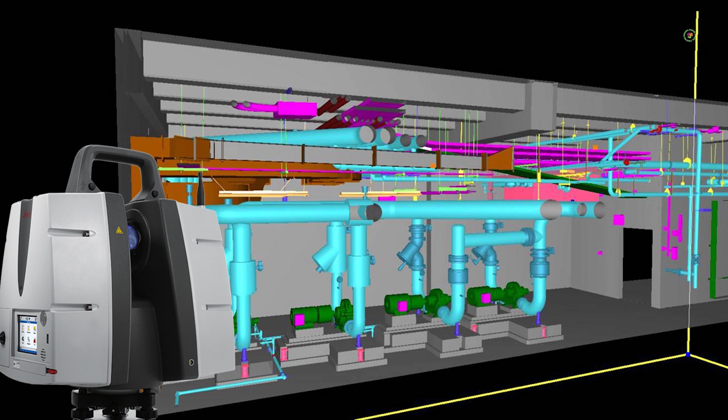There will be a main pipeline, distribution pipelines, sub pipelines, finally going into the house. Each pipe diameter is different. The mainline pipe bringing water to the overhead tank may be 1 meter or 50 centimeter diameter, but the main pipeline taking water to the entire village may be 30 centimeters. From there, the pipeline going to sub pipelines may be 15 centimeters.

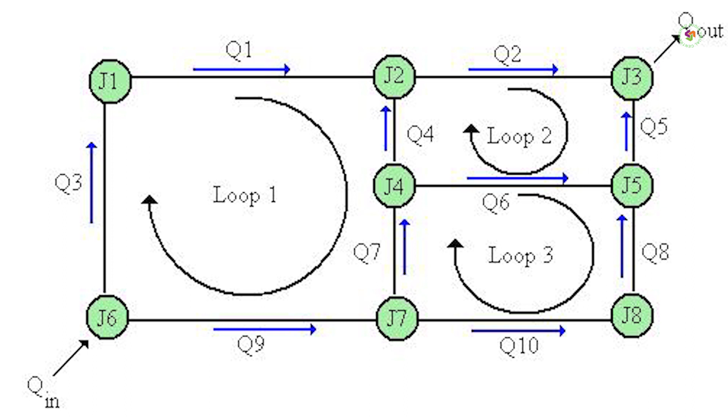From there, the pipeline going street-wise may be 10 centimeters, and from there to your house it may be, for example, 2.5 centimeters. So there are different pipeline systems.

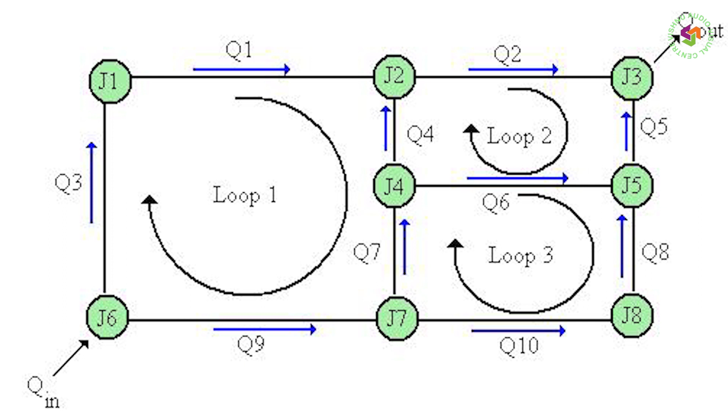My sincere request to you: please visit a pipe shop and inquire about the various sizes of pipes available. You cannot have your own custom size of pipe. For problem-solving or theory learning, we can write any diameter - 9 centimeters, 5 centimeters, 4 centimeters, 3 centimeters, 2 centimeters. But are they really available in the market?

The market availability will be different. There may be, for example, 2.5 centimeters, 1.25 centimeters, 5 centimeters, 7.5 centimeters, 10 centimeters, 15 centimeters. So what are the standard sizes of pipes?

You can check YouTube for standard pipe sizes used in water distribution systems, which gives you an idea about what is happening actually. So in that context, how this pipeline network works - a little introduction only we are giving at this level, real analysis I'm not touching here, that's beyond your level.

You should understand there is a system of network analysis when planning water distribution to a village, area, municipality, or town - whatever it is, there is a system. I want to introduce this so that once you enter the field and start doing it, you understand how to go about it. With this introduction, I will share the whiteboard and let us discuss in detail.

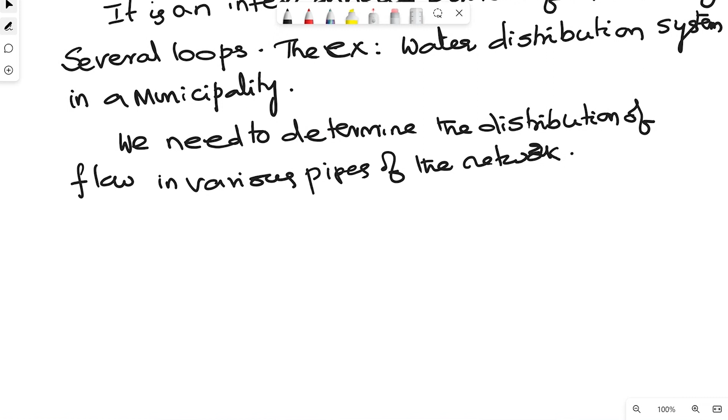In order to really do it, there are certain necessary conditions to be satisfied. What are they?

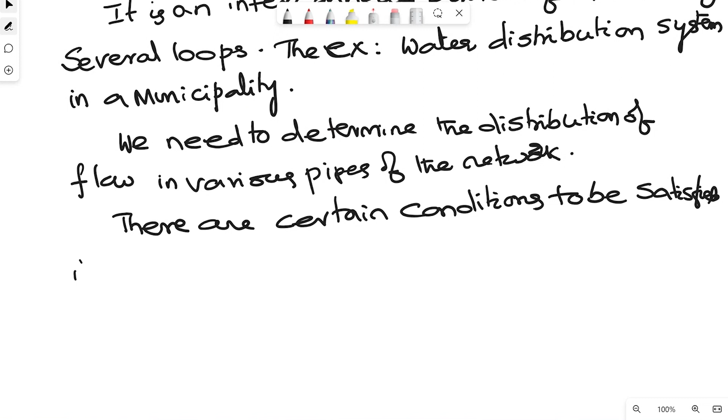Number one, the flow into each junction is equal to the flow out of each junction. That's nothing but satisfying the continuity equation, that's all.

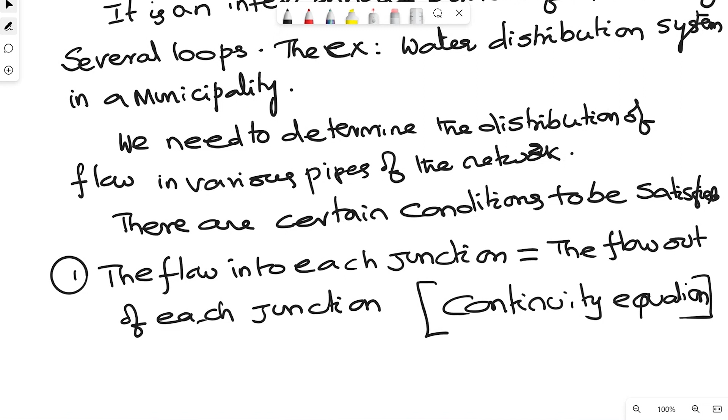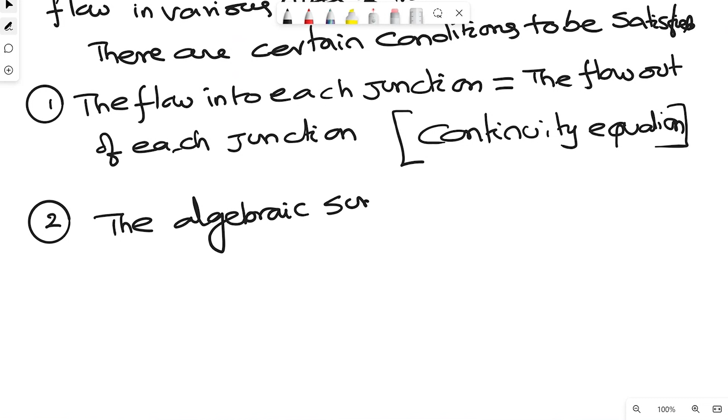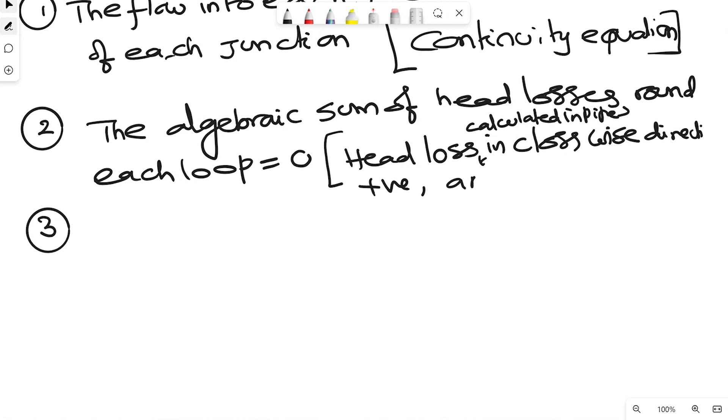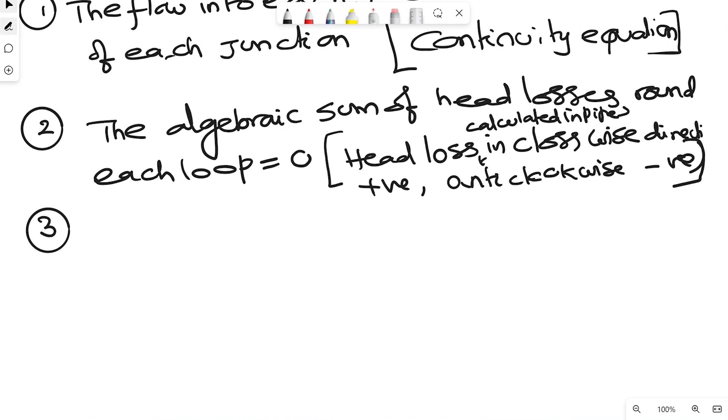Then number two, the algebraic sum of the head losses around each loop is equal to zero. I will explain by drawing a loop also. We take head loss calculated in pipes in the clockwise direction as positive, and anti-clockwise as negative to calculate with.

Then next, head loss in each pipe is given by HF equals R into Q square. What is this R?

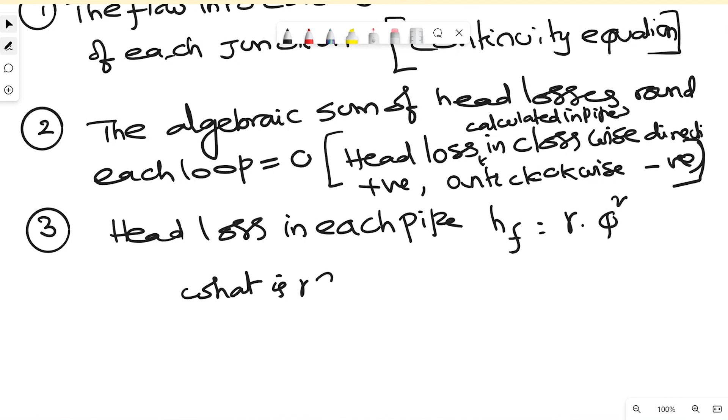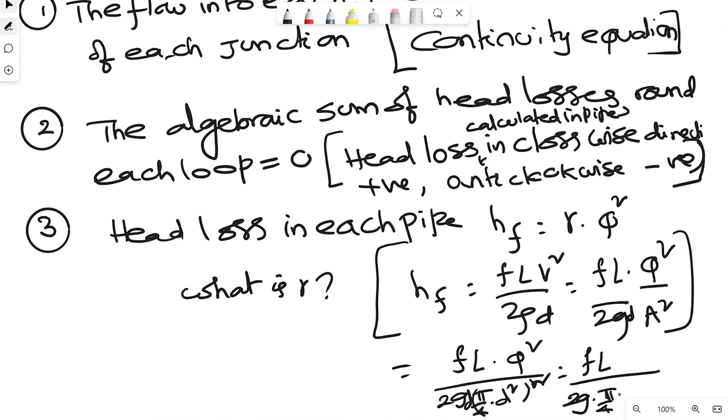Suppose, for example, you take it. You know HF is equal to FLV squared by 2GD. So what I can write, FL into Q square by A square into 2G. So that is equal to FL into Q square by 2G into pi by 4, basically 2GD into pi by 4 D square whole square. So it is FL by 2G pi by 4 whole square into D to the power of 5 into Q square.

This is called as R. It is equal to RQ square. So kindly note that. Then fourth point, as it is difficult to solve the pipe network problems

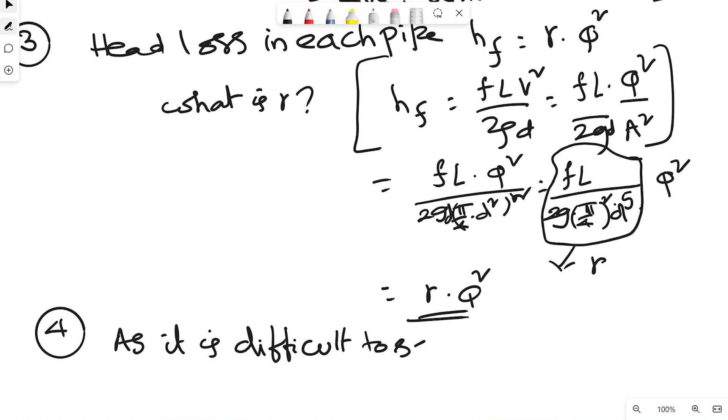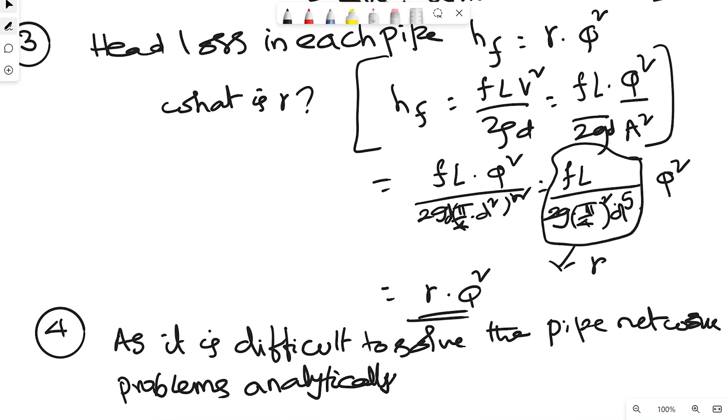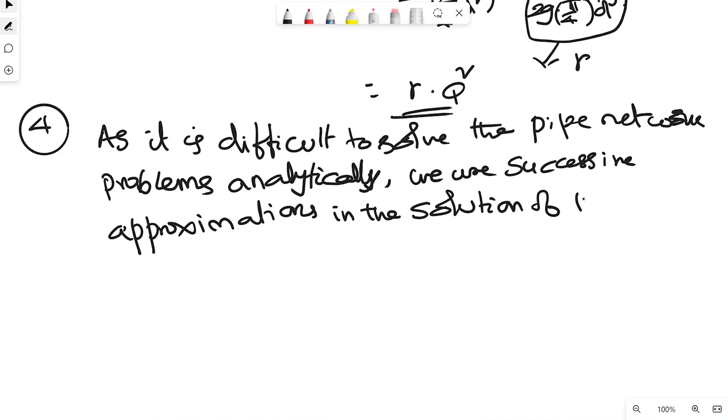analytically, right? We use successive approximations in the solution of the problems. That is next.

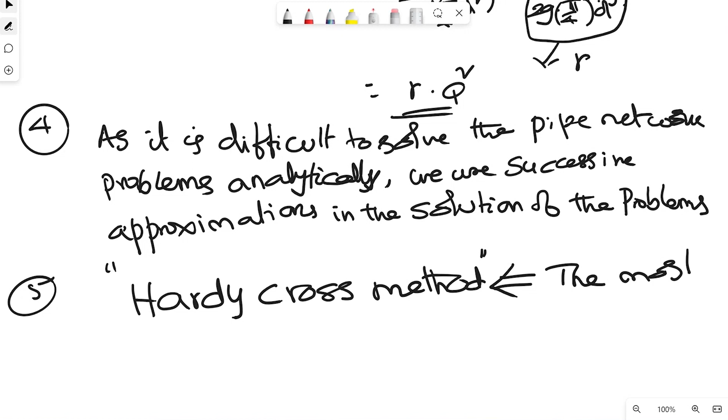The last one is the most popular method to solve the pipe network problems is Hardy cross method. This is the most popular method to solve pipe networks.

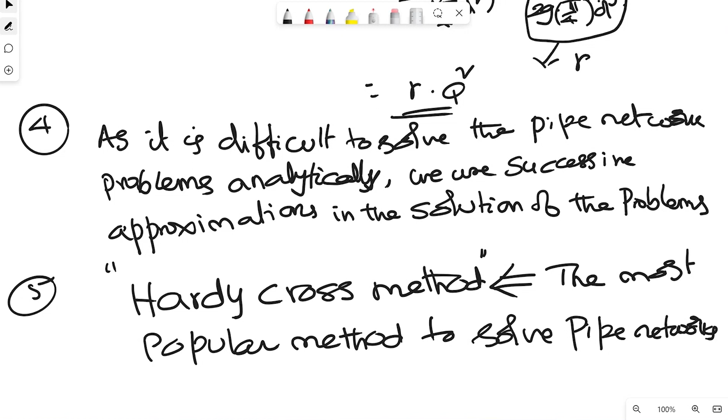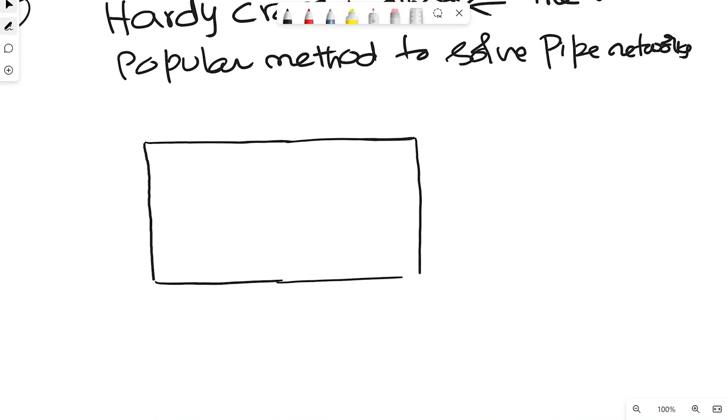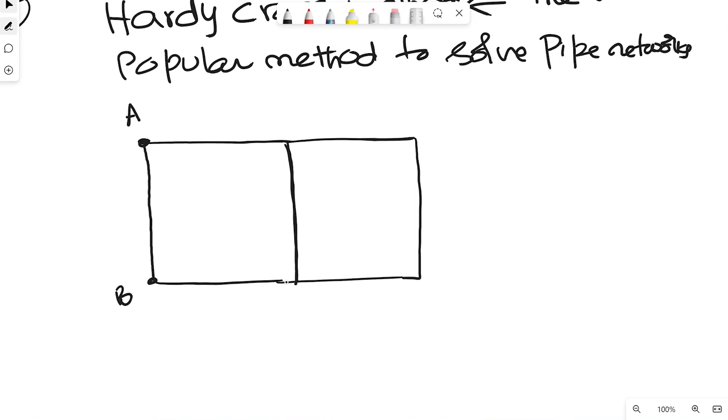Now I will explain you also what it is and then how to go about. For example, I take, because this is only in the villages or towns, it may not be exactly that. Don't take all will be like rectangles, all will be like what you call it as squares. Only for explanation sake, I am taking it. For example, this is the network I will take it. So this is A, this is B, for example, C, this is D, for example, this is E, this is F, and this is G.

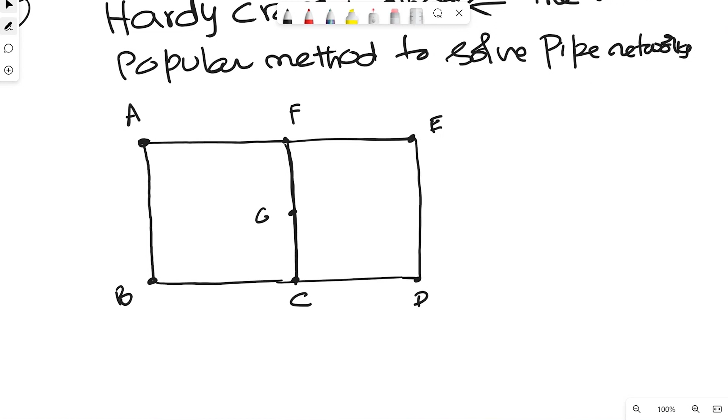Right? If you see, this is the whole network. This is how the pipelines are arranged. So the junctions means two pipes wherever they are joined. It is all called as junctions. This A, B, C, D, E, F, G are the junctions. Now, if I take this, this is the flow in,

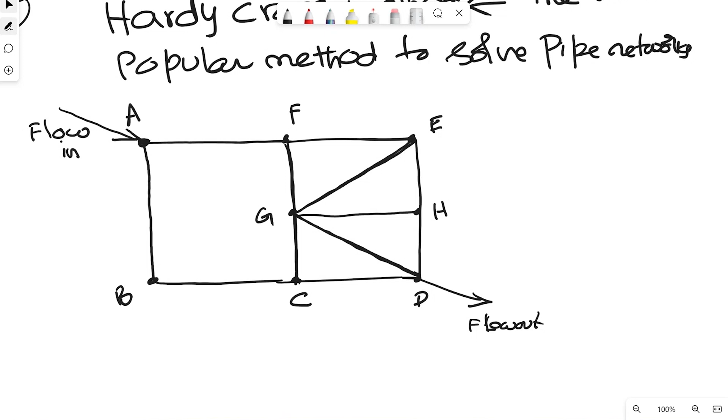and finally this is flow out. So now if I take this as a diagram, this is the direction, this is the direction which is given, because these are all flow directions which are given. I am not doing anything in this. Any problem when you are doing from the source, from the starting point to the end, how the flow takes place, the direction we should be knowing it.

This is how actually the flow is taking place in the thing. So this A, B, C, F is one loop actually. Similarly, G, E, F is another loop. G, E, H is another loop. G, H, D is another loop. G, D, C is another loop. Like that, there are many loops in this particular problem actually.

So again, he mentioned that the flow into the junction is equal to the flow out of the junction. That is the first point which I mentioned for. Then algebraic sum of the head losses in any loop should be zero. Suppose this is clockwise, this is clockwise, this is anti-clockwise in the GC. Suppose again this is actually in the anti-clockwise, and again this is.

So now if I take it in this loop, this is clockwise, AF is clockwise, the head loss in AF is clockwise, the head loss in FG is clockwise, whereas the all other three are anti-clockwise. So the summation of all these head losses must be equal to zero. That is that. And head loss in any of the things is equal to just FLV squared by 2GD.

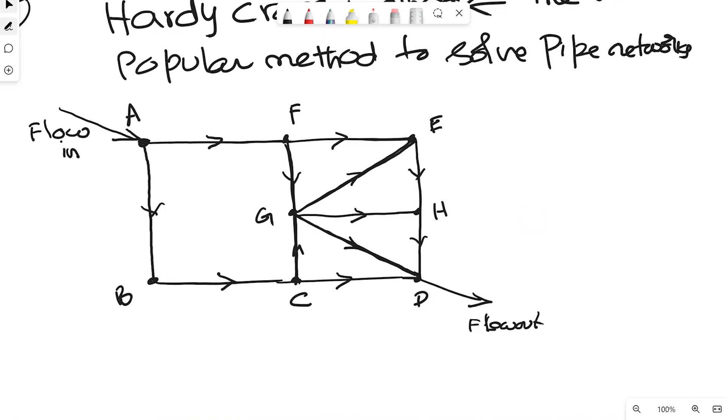So now we are only discussing about what is that Hardy cross method. In this Hardy cross method, how we go about the problem. Only now at this level only I am talking about the method, right? What is our problem actually? Discharge in each of these pipelines, how much, how you are going to distribute.

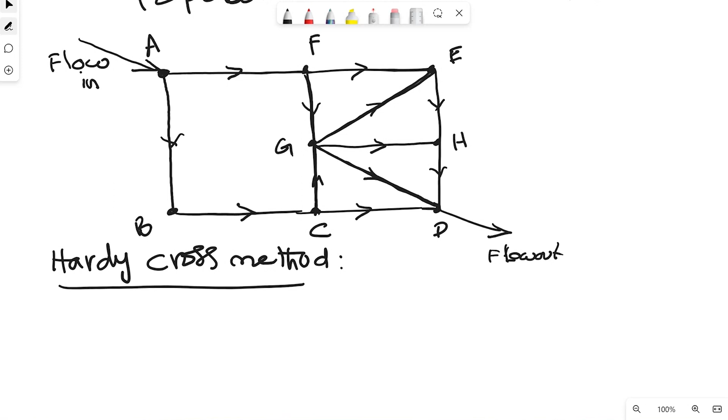For example, here x discharge is available, so this x discharge, how you are distributing into the pipe network, what is the amount of water that you are sending. For example, here 100 meter cube per second is coming, how much is going into the AF, how much is going into AB. For example, by the time it comes, suppose you are distributing 50-50. Now here 50 is coming, how this 50 will go like this, then from this 50 whatever it is, how much will go into this line, how much will go into this line, like that at each junction, or which we call it as a node, then we need to really decide.

And deciding that discharge in each of the pipeline is the method actually. What is the amount q in each of these pipelines is our question actually. How to determine that is our question. First, what we will do, number one, how we will start basically in this method.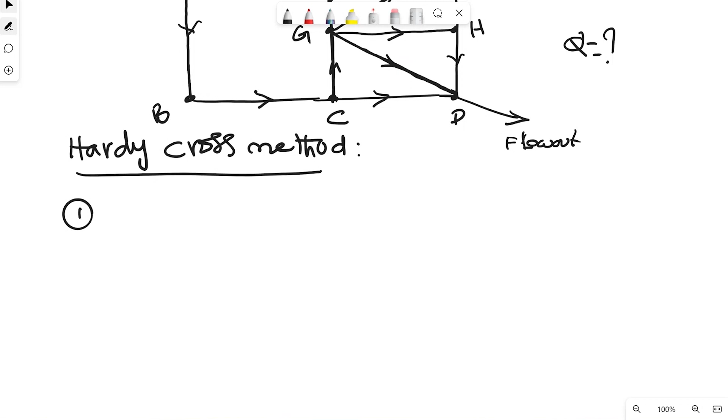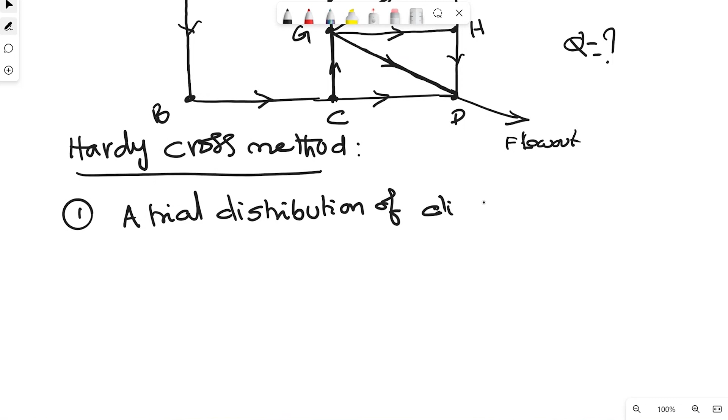First, a trial distribution of discharge is made arbitrarily such that continuity equation is satisfied.

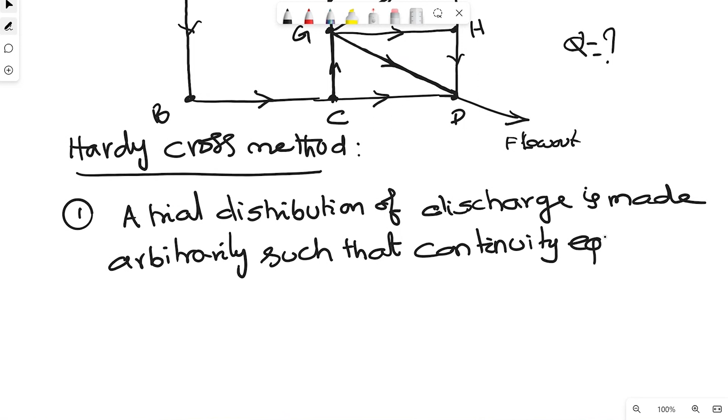What do you mean by that? Now I am telling, I know what is the flow in, that means how much flow is coming into the network. This will be given to you. But how that is distributed is the question. So now I don't know anything. So, for example, based on experience, I will see how many pipes this particular AF is supplying and how many pipes this AB is supplying.

For example, I assume that in this AF pipeline, out of 100 meter cube per second which is given to me, suppose 60 is going in AF and 40 in AB, because the remaining is only 40, because the continuity equation is to be satisfied. So if I assume 60 meter cube per second, this is only arbitrary, there is no rule for it. Start with some value first. That is the question I am giving.

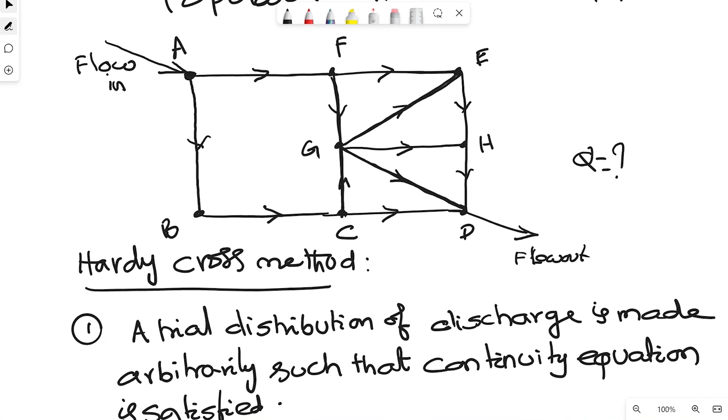Suppose if I say here 60, naturally this should be 40. Like that, if you are taking this as 70, this will be 30. If you are taking 80, 20. If you are taking 50, 50. Like that, arbitrarily choose the first discharge, such that the condition is that the continuity equation is satisfied at each node.

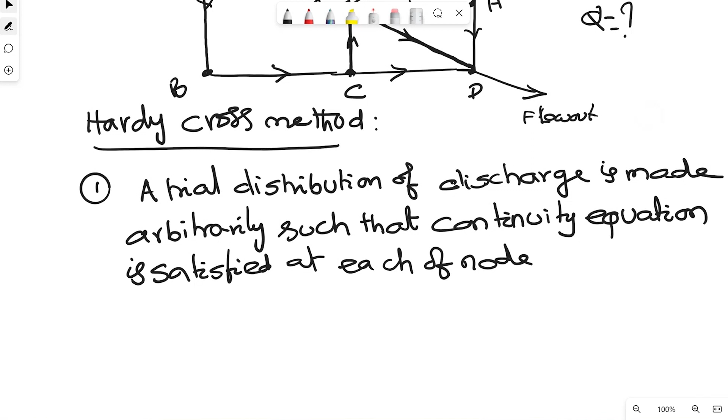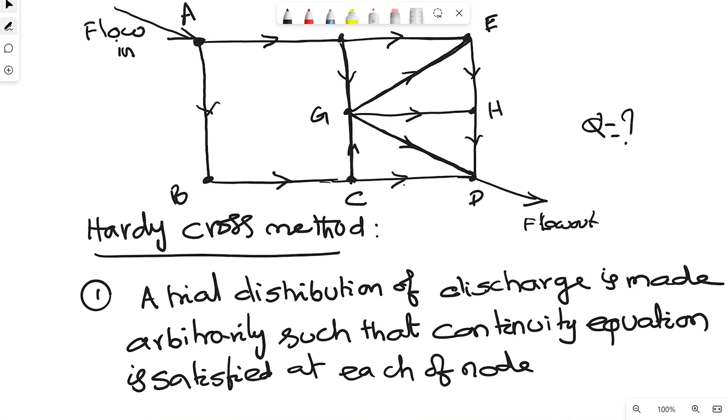That means, for example, 100 you are giving, 60 and 40 are coming. So now 40 has come, so all 40 will go. Once 40 comes here, how much should go here? Naturally, incoming is 40, so outgoing, for example, this is 30, this is 10. So like that, the continuity equation is satisfied at each node. That is what I mean by the first step. Then second,

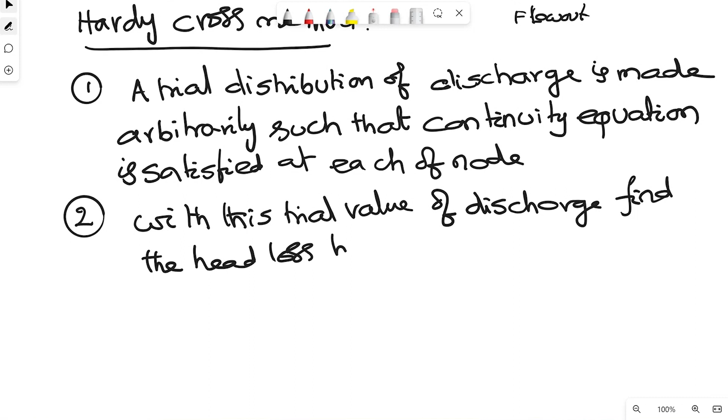with this trial value of discharge, find the head loss in each pipe. So first you have distributed whatever discharge is given to you to each of the pipes. Once you have distributed that, with that trial value of discharge, calculate HF is equal to R into Q square.

What is R actually? R is equal to F L divided by 2G into pi by 4 whole square into D to the power of 5. Friction factor of the pipe is known to you. Length of the pipe is known to you. Diameter of the pipe is known to you. So you can calculate this R value. Don't think it is specific weight, it is just some R value. Then put that R value here, and you have already given some trial value for Q, so calculate HF. This is the second step.

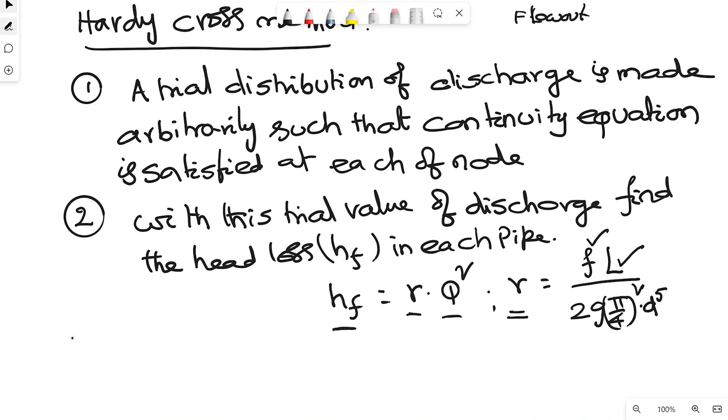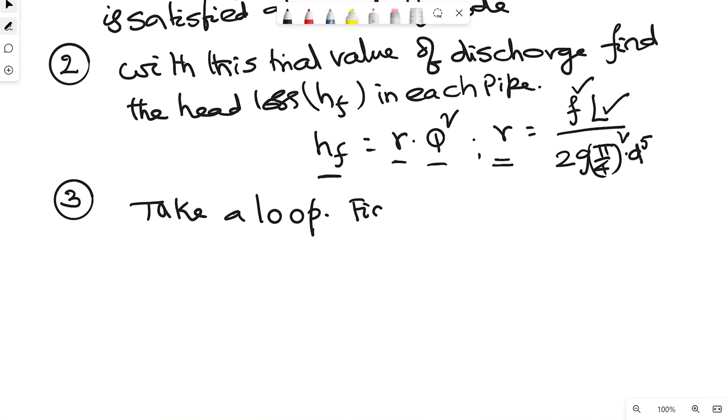Once HF is calculated, the third point is take any loop and find the algebraic sum of the head loss. As I already mentioned here, clockwise head loss is positive, anti-clockwise head loss is negative. So like that, calculate the algebraic sum.

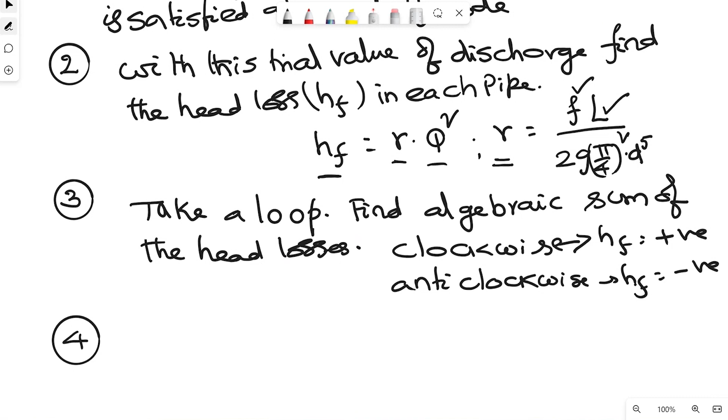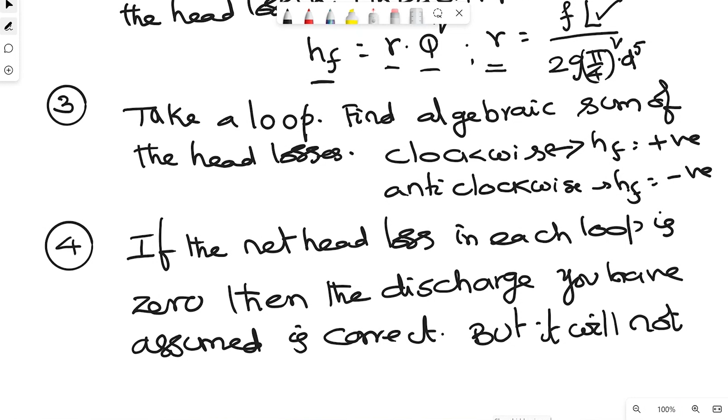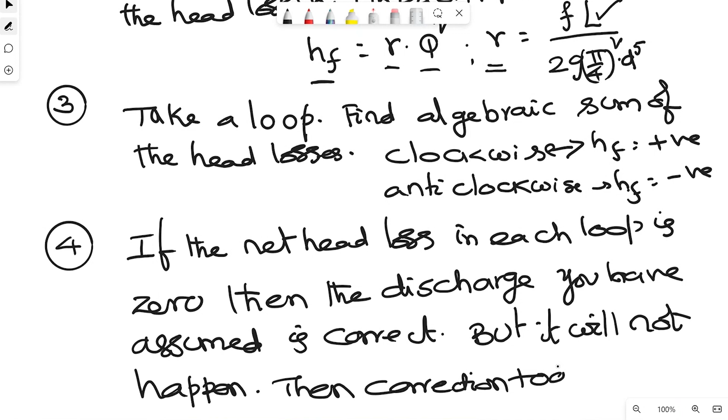If you calculate the algebraic sum, if the net head loss in each loop is 0, then the discharge you have assumed is correct, but it will not happen. Then correction to discharge has to be applied. You have to apply correction for the discharge.

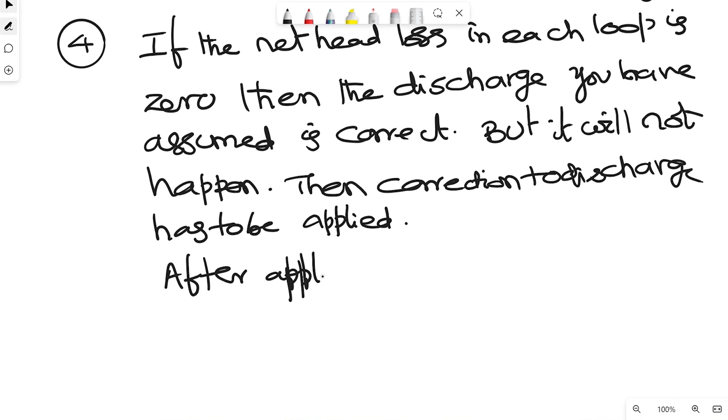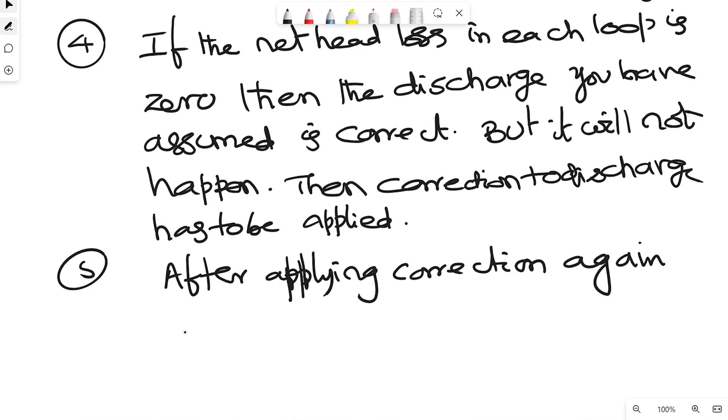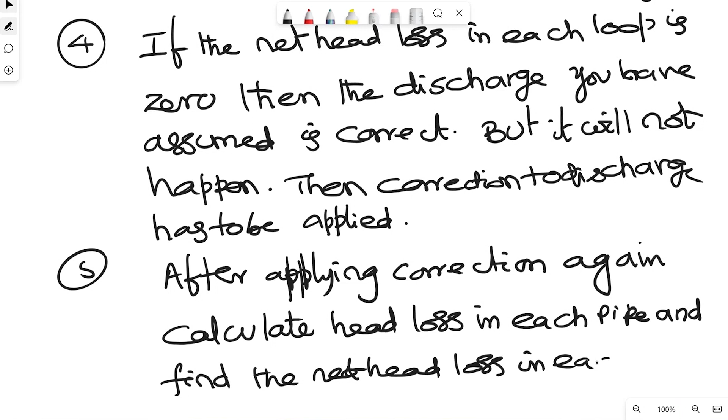After applying correction, again calculate head loss in each pipe, find the net head loss in each loop, and continue this process till net head loss in each loop is 0.

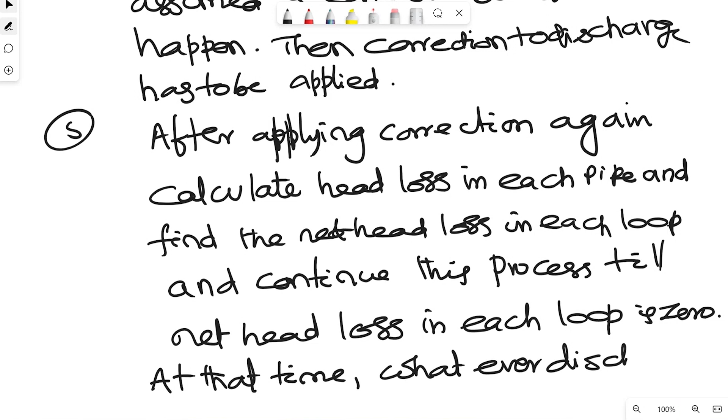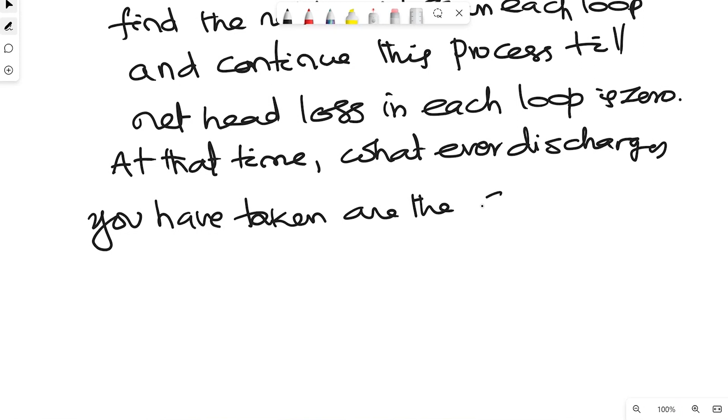At that time, whatever discharges you have taken are the correct discharges. So this is the topic, and I will give you the correction factor also, just for the sake of noting down what people will finally apply and how they will apply it. The correction factor I will share with you in the classroom also. This is the general method of solving the Hardy Cross method for solving pipe network problems.

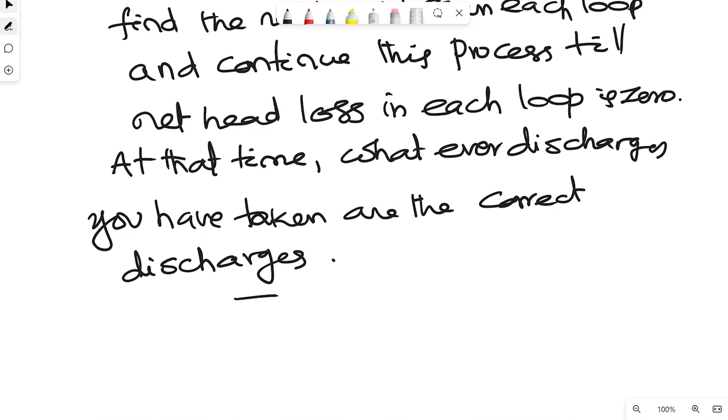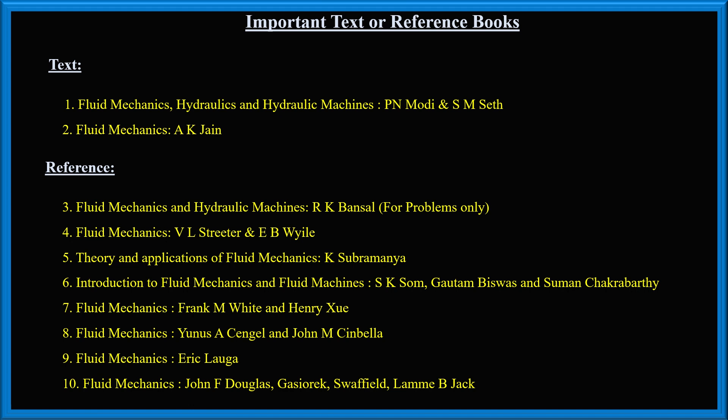So in this particular class, we discussed what is a pipe network problem, where we have to find out the distribution of flow in each of the pipes of the pipe network, what method is used for that, and what is the general solving procedure for that method. In the next class we will take up the correction factor that has to be applied in these pipe networks and proceed further.